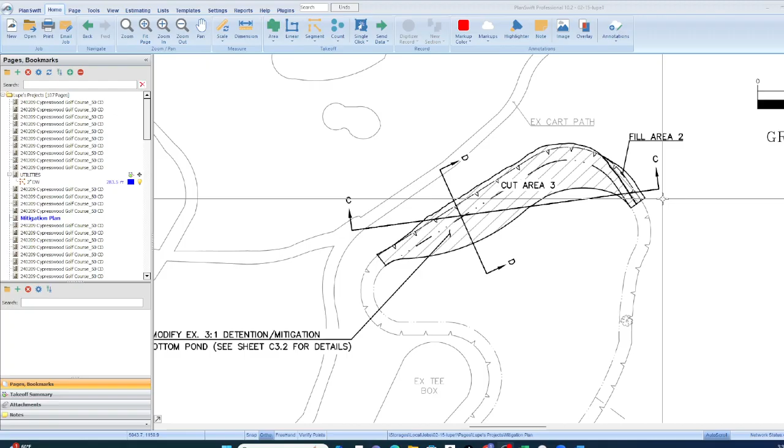So let me show you one thing. Excavation. What this plan does, it gives us our cut area, and it gives us some section views. You got to know how to look at that. You got to know what that means. So basically what it does is it brings you to something like this that's to scale. Gives you your cut area.

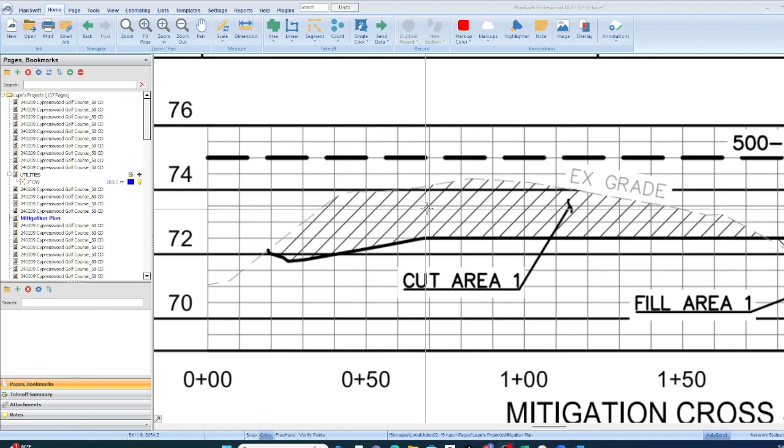The proposed grade is always going to be in black. What's existing is always going to be in gray. And so if you use this scale, you'll be able to determine how many cubic yards you need to cut or fill.

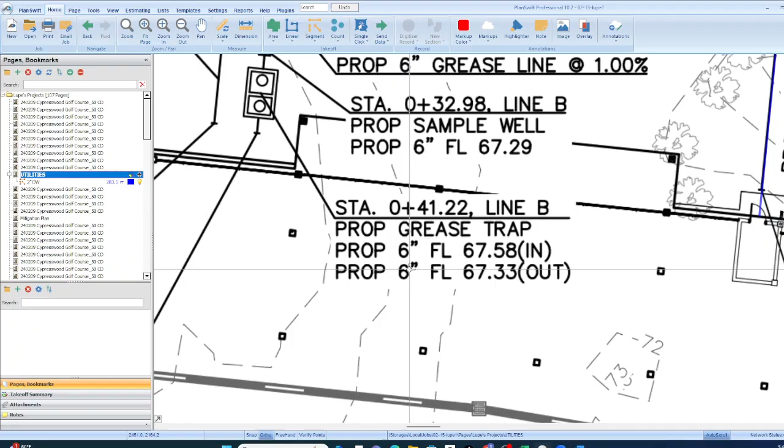Okay, now underground utilities. Everything is shown here. This means something. This tells us the size of the pipe, what it is, and tells us the GPS coordinate of where the pipe is coming in to that grease trap and where the pipe is going out. Okay, so if you do this for a living, it's really important that you're able to read these plans.

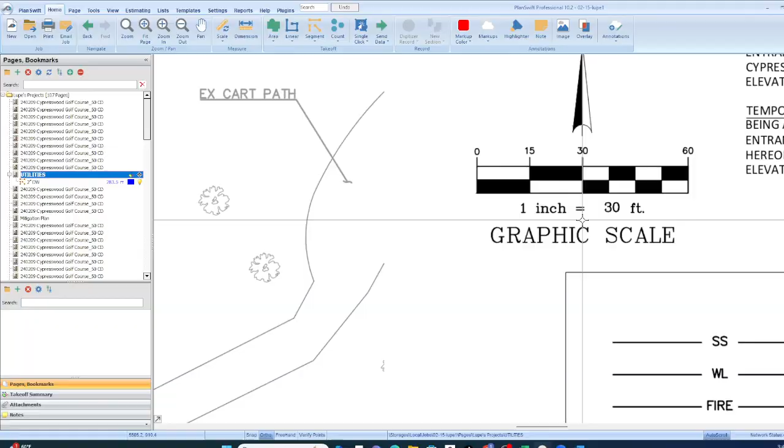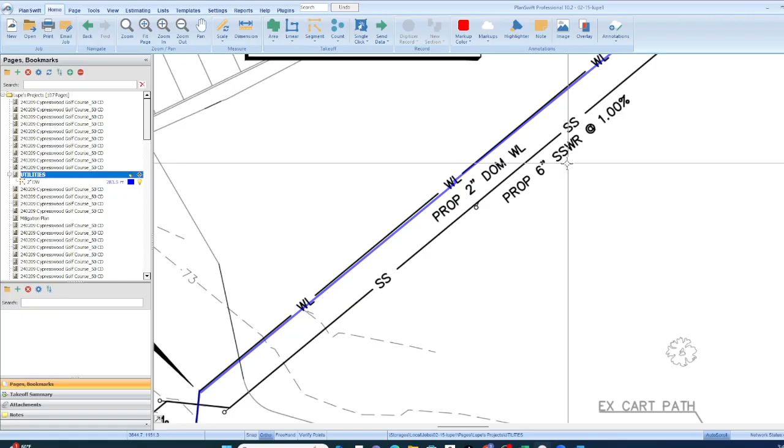So we put this to scale, and for every 1 inch, it's really 30 feet. So we scale it, then we measure it. So just very quickly, we measured this DOM, that's the domestic water line, and we had about 283 feet of that. And then we also have a 6-inch sewer line. This tells you the slope. It's to slope 1% as it moves on per foot.

So that's why you want to take these classes if you're doing this work. You want to understand what all the symbols mean. What's the difference between proposed and existing? Why is one gray? Why is one black? We explain all of that. How to read the scale.

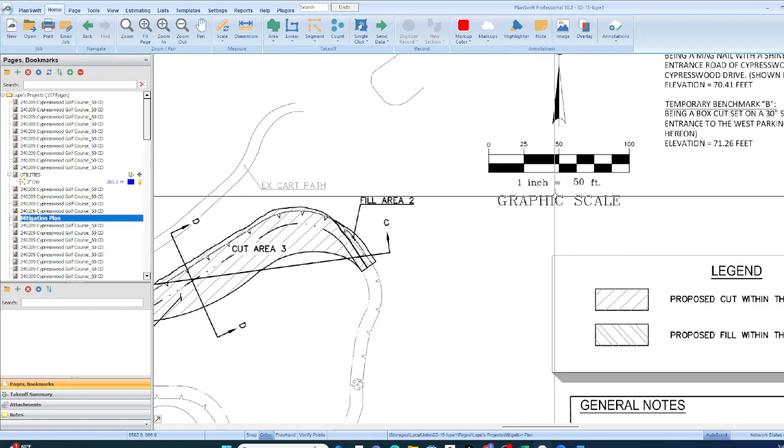Okay, so I just wanted to go over this very quickly. If you're doing underground utilities, you also have to do the excavation. Now they have a new fancy term, mitigation plan. I don't know why; it's just the excavation plan. Same thing here though. For every inch you measure, it's 50 feet.

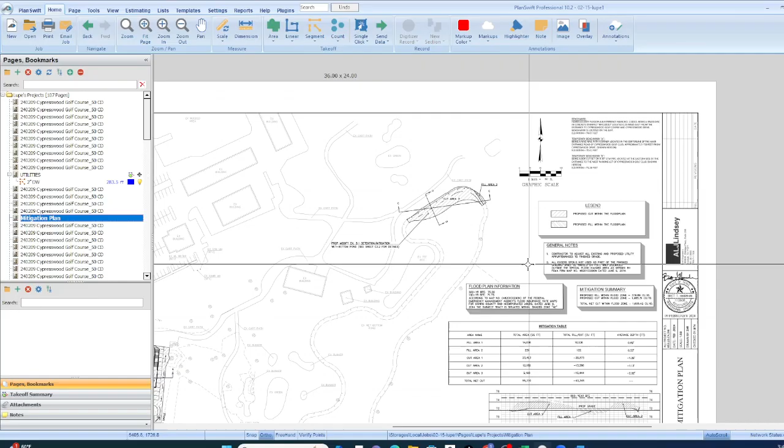Okay, so make sure sometime in 2024, we have a class beginning February 20th, 3-day class, an hour a day, where we go over the full civil set and show you how to read the plans. If that's your scope of work, you need to know. You need to make sure you know what you're looking at. The utilities, underground utilities, what all this means, and how you can learn to put your estimates together and to perform very accurate takeoffs. What view are we looking at? What's the difference between the plan view and the section view?